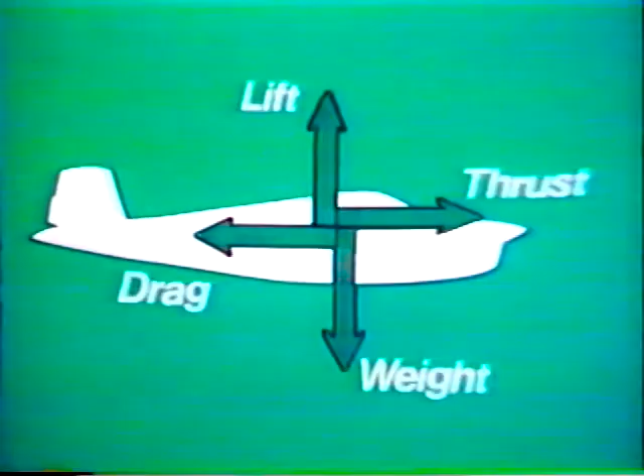In this first tape, I will revisit with you some of the areas you studied when you were first learning to fly. We will discuss the atmosphere, its composition, and its properties of pressure, density, and viscosity. Next, we will examine the 4 forces which act upon an aircraft in flight. We will look at an airfoil, name its parts, and establish terminology important to understanding the generation of lift, such as angle of attack, camber, angle of incidence, and chord line.

The principles and laws of Bernoulli will be explored along with the theory of circulation. As a result of this, the relationships among camber, relative wind, and angle of attack should be well established in your mind.

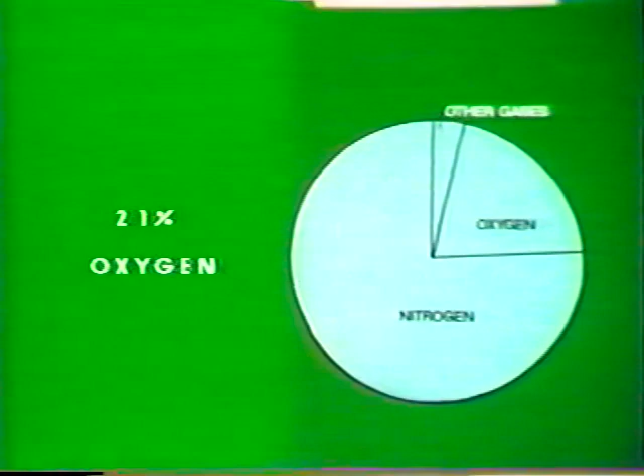Except for scientists who study it or environmentalists concerned about its quality, most people give little thought to the air which surrounds them. But if you're counting on it supporting you immediately after rotation from the runway, you should reacquaint yourself with it. Almost everyone remembers that dry air is 78% nitrogen, 21% oxygen, and 1% other gases. The ratio of these gases remains the same around the world and as high as the atmosphere extends.

Water vapor is also a gas found in the atmosphere. Its quantity may vary, unlike the other gases whose ratio is pretty well constant. It may make up from near 0% of the atmosphere to a maximum of about 5%. As the amount of water vapor increases at a given point, all other gases are reduced proportionately.

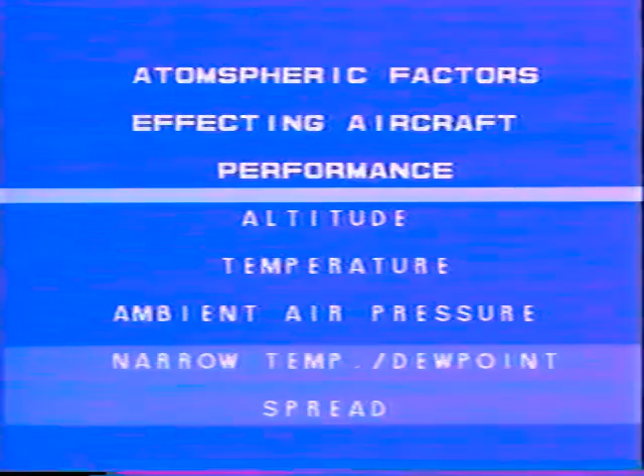Most of us probably know that air is a gas and as such has all the properties of gases. It has mass and weight. It can exert pressure, it can be compressed or diffused causing changes in its density, and it can flow. It offers resistance to objects moving through it. All of these properties are at work when you fly your plane through the atmosphere.

Let's first look at the words static pressure. Remember the 14.7 pounds per square inch you learned in junior high school science? That was supposed to be the normal air pressure. That is static pressure. You probably remember a specific number without any qualifications. However, the figure is an arbitrary one and only pertains to sea level on a standard day.

If you went to school in North Platte, Nebraska, the figure you learned as normal air pressure was about 1.5 pounds per square inch off. Air pressure on a standard day in North Platte is more like 13.2 pounds per square inch.

Static pressure, then, is the force exerted by the weight of the atmosphere pressing down from hundreds of miles in space. It is pressing down because it has mass and is reacting to the pull of gravity. If that is so, why isn't the pressure equal regardless of altitude? Why does North Platte, at a little over 2,800 feet, have over a pound of pressure less than at sea level? One of the other properties of air helps us explain it.

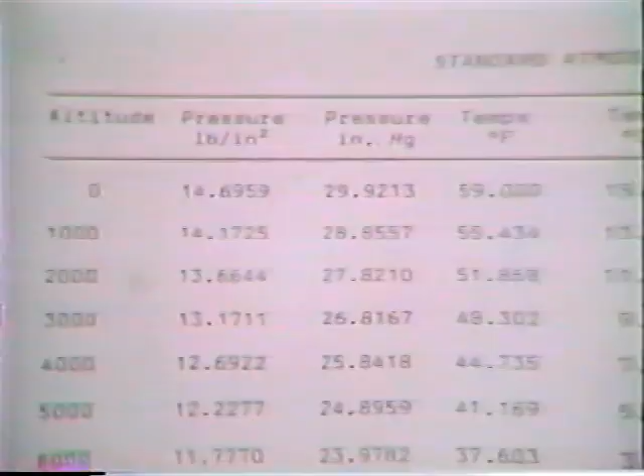Let's take a look at a chart which represents a standard day, one of those we mentioned earlier. This illustration is an excerpt and not the complete chart, which was originally put together by the National Advisory Committee for Aeronautics, the predecessor to NASA.

The chart is based on many years of weather observations, and since it was published, has been confirmed as basically accurate. Its purpose is to provide a common denominator for the measurement of aircraft performance and to provide a standard upon which to calibrate and correct the readings of some aircraft instruments. The chart will be important when we discuss aircraft performance and in other presentations dealing with instruments.

Before dealing specifically with any one of them, let's take a moment to review the four forces acting on an airplane in flight. You know them as thrust, drag, lift, and weight, or gravity as some prefer to call it. The two forces which are constantly trying to bring you to a stop on the ground are drag and gravity.

The two forces which you must produce to overcome these negative forces are thrust and lift. Thrust must be able to overcome drag, and lift must be able to overcome gravity before the plane can get off the ground. In a stabilized flight condition such as level flight, climb or descent at a constant velocity, thrust and drag are equal, and lift and weight are equal.

The propeller is producing a given thrust, but the total drag equals that thrust and limits the speed of the aircraft. The weight of the plane plus a little extra aerodynamic weight is equaled by the lift produced over the wings. In aerodynamics, this stable condition is known as equilibrium.

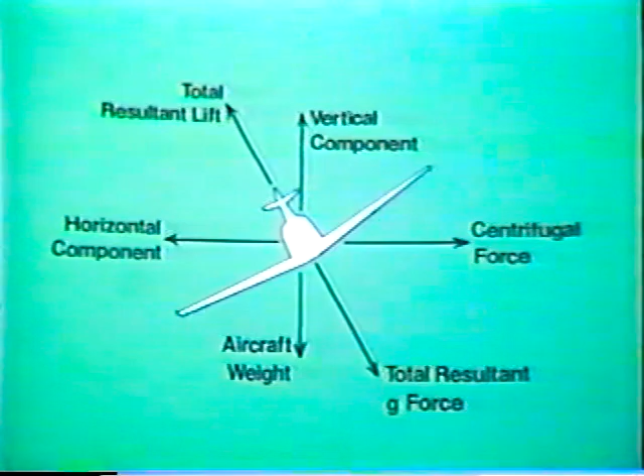Now we come to the big question. What is lift, and how is it produced? Before we get the answer, let's look at some pictures and review some more terms.

An airfoil is any part of the plane shaped so that it responds to air movement by producing differential pressure on either side of the airfoil. The wing, propeller, and empennage are the important airfoils.

Leading and trailing edges of the wings seem pretty obvious, but they do more than just outline the silhouette of a wing. Their location has much to do with the aerodynamics of an airfoil. A line connecting the leading and trailing edges of an airfoil is referred to as the chord line. It should not be thought of as permanently anchored, since it moves as high lift devices change the shape of the wings. Its position in relation to the relative wind and the longitudinal axis of the aircraft are extremely important.

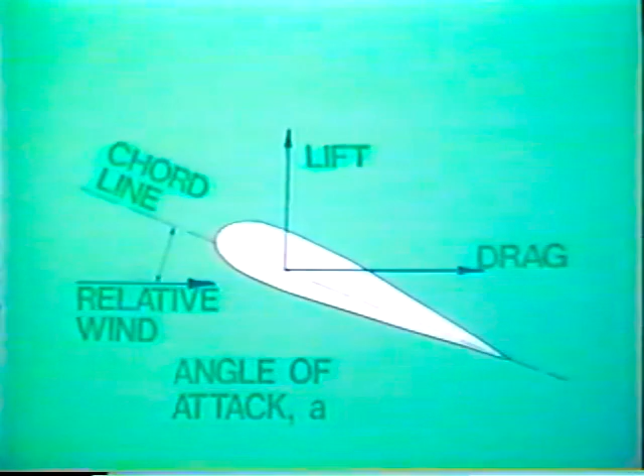Camber means curving or bending. On an airplane, it refers to the curving surfaces. A wing which has identical curvature top and bottom is known as a symmetrical wing. An asymmetrical wing usually has a flatter lower surface with more curvature on top.

Relative wind is the airstream created by the movement of the plane through the air. Most of the time its direction is opposite the flight path of the aircraft, but it may be deflected by gustiness or wind shear. Angle of attack is the angle between the relative wind and the chord line of an airfoil. Increasing the angle of attack will increase lift and also drag. It also determines the point at which a wing will stall. A given wing will always stall at the same angle of attack, regardless of speed or attitude.

It is rare that a manufacturer fits a wing to an airplane so that its chord line is parallel to the longitudinal axis of the plane. In normal cruise flight, they want the fuselage to be parallel to the ground, but it must be able to support maximum gross weight at the same time. Therefore, the wing is set into the plane at what is called the angle of incidence. This provides just enough angle of attack so that the pilot should not have to trim beyond a neutral position.

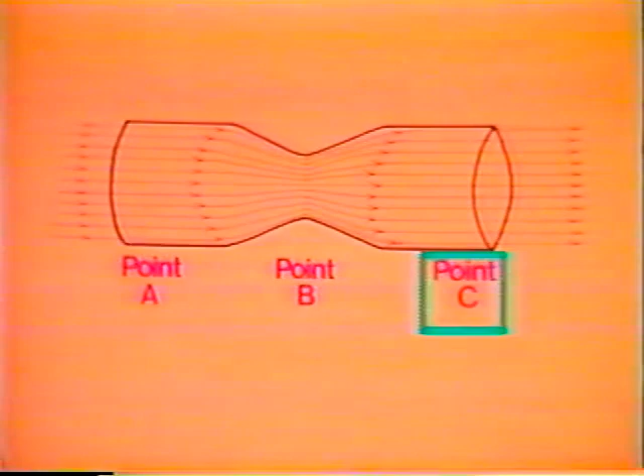The law of the conservation of energy requires that total energy in the tube remain the same. Therefore, we have taken from the potential energy to create some kinetic energy. Since potential energy was represented by static pressure, we have reduced the static pressure by using some of its potential energy to create greater velocity at the restriction at point B. After the airflow passes the restriction at point B, its velocity decreases and the pressure increases. If the velocity at point A and C are the same, then the pressure would be identical.

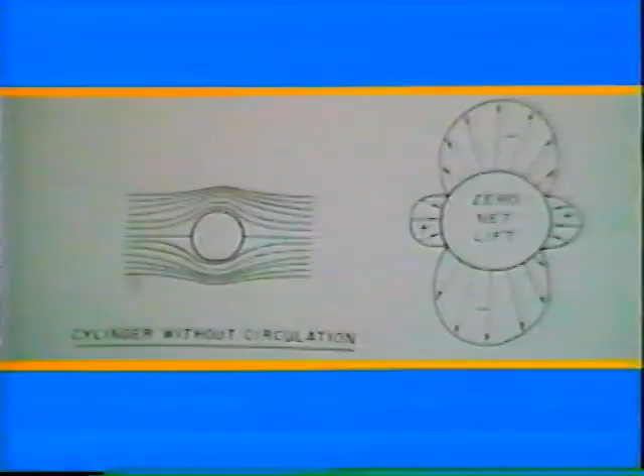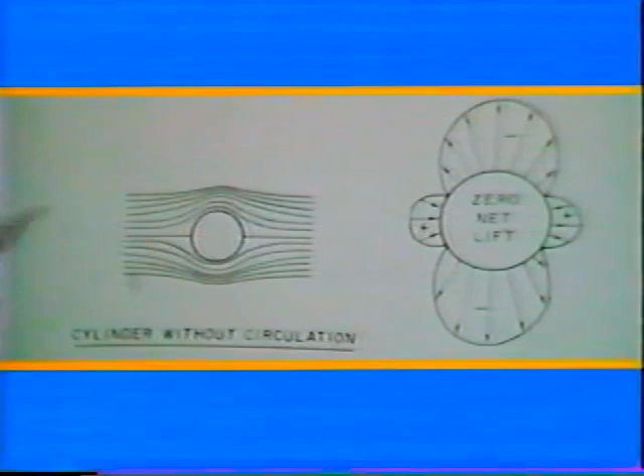Another important concept in the generation of lift is circulation. If you are a baseball fan, you probably have seen its effect on a pitched fastball. Look at this diagram of a cylinder and an airflow. We will ignore density and viscosity at this point. Note the pattern first where the cylinder is stationary, and in the second illustration where the cylinder is rotating.

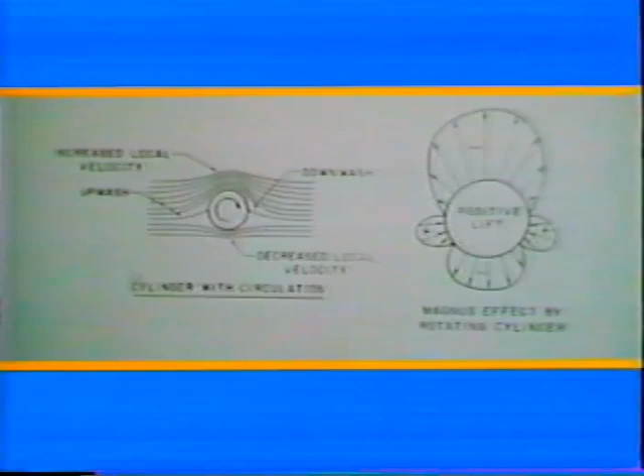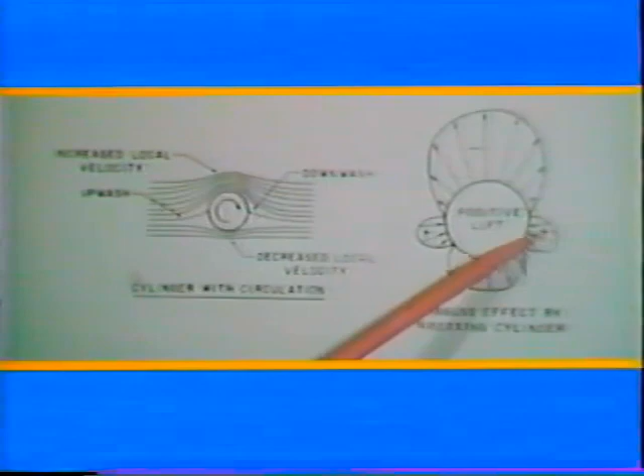The circulation of the cylinder has produced not only a larger amount of lift on its top side, but it has also produced an upwash ahead of the cylinder and has moved the stagnation points toward the bottom. There are normally two stagnation points on an airfoil. They occur along the leading and trailing edges of an object placed into an airstream. At the leading edge, where the air separates to go either above or below, a small area exists where there is no air movement. At this point, a stagnation pressure develops, which is the sum of the ambient pressure ahead of the wing and the dynamic pressure around the wing. A similar area occurs along the trailing edge of the airfoil.

Apply this concept to baseball. The pitcher puts some backspin on the ball as he throws. The highest velocity exists over the top of the ball, creating lower pressure there than on the bottom. This lifts the ball. It actually bobs up from the plane in which it was thrown.

And if it's a good fastball, the batter will undercut it completely.

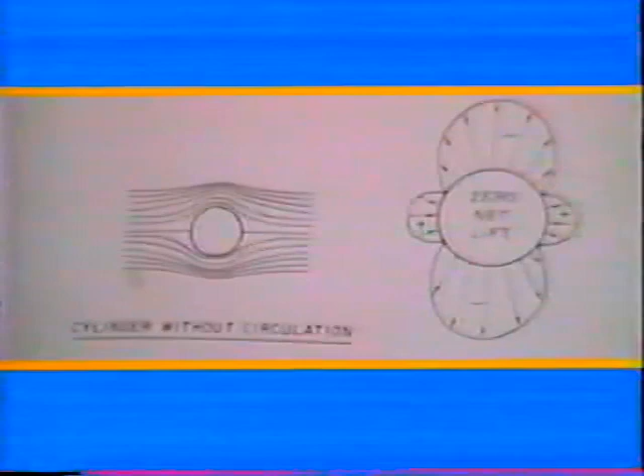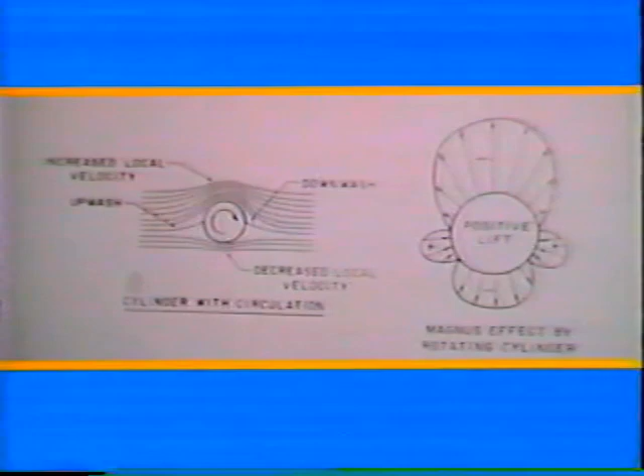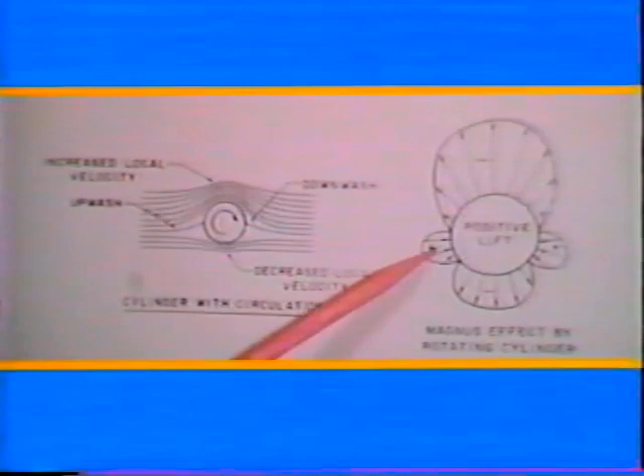Now look at the diagram where the cylinder has been placed in rotation. Lift forces on the top, where velocity is greatest, has increased, while the opposite is true on the bottom. The stagnation points have moved to a lower position. The net result is a positive force acting perpendicular and upward from the cylinder.

The position of stagnation points is of additional importance to you. It is the leading edge stagnation point that has the area where ice formations start. Because of the stagnant air at this point, the ice sometimes develops almost a horn shape, which continues to build out beyond the stagnation area under some circumstances.

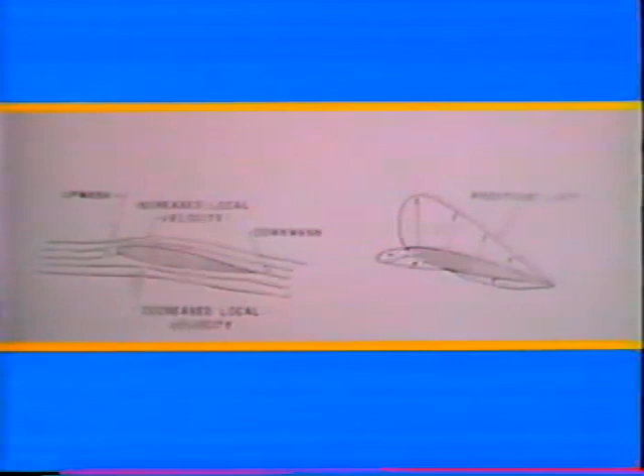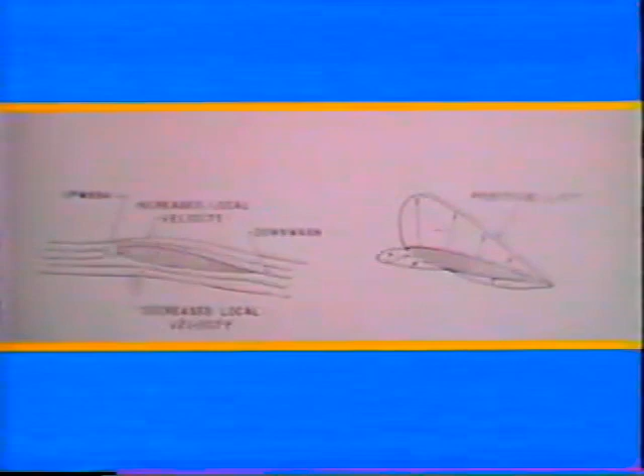The symmetrical airfoil, tilted to a positive angle of attack, shows very similar pressure patterns. Note also the upwash ahead of the airfoil and the downwash behind the trailing edge. The airfoil appears to have the same circulation around it as does the circulating cylinder. This helps explain why velocity of the airstream over the wing accelerates as the wing is placed in motion. It is subject to the same type of circulation.

One more observation deserves our consideration. The symmetrical airfoil at small angles of attack may develop negative air pressure both top and bottom. It will be true, however, that the least pressure will still be on the top of the wing. It is also true that at high angles of attack, the pressure on the surface will be increased. It will force large quantities of air down in the downwash coming from the airflow over the top of the wing. In this situation, up to one third of the lift force may come from the increase in pressure.

So far, I've presented you with three important concepts on the production of lift. First, the Bernoulli principle utilizes the theory of conservation of energy, and it explains why air placed in motion over an airfoil reduces the pressure. Second, the theory of circulation helps us understand why the velocity of air flowing over the wing is greater than that flowing beneath the wing. Third is Newton's third law, which states that there must be a reaction for every action. We know that large quantities of air are forced downward behind the trailing edge of the wing. If we force air downward, the reaction in nature is to force the wing up.

Now that we know why lift is produced over the wing, let's take a look at how engineers determine the amount of force produced by this phenomena. It will involve a mathematical equation, but not one that you should find very intimidating. The formula for lift looks like this: lift equals the coefficient of lift times one half of the density times the velocity squared times the wing surface area.

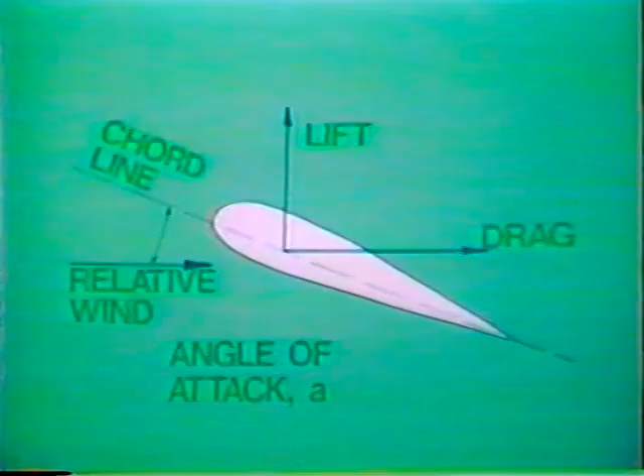All of the items seem obvious except coefficient of lift. This item is an index number representing the ratio between lift pressure and dynamic pressure. It is related to the shape of the wing and the angle of attack. The maximum lift coefficient for any wing occurs at the point of the stall. We know that a wing will always stall at the same angle of attack. We therefore reach the maximum coefficient and the stall angle of attack at the same time.

This has implications for landings and takeoffs. For illustrative purposes, let's place two aircraft on a runway side by side. All factors are equal except the maximum coefficient of lift. Airplane A has a maximum coefficient of lift of 1.8 with a thick asymmetrical wing, while B has a thin symmetrical wing with a coefficient of 1.0. Which plane will use less runway for its landing and takeoff? It will be the aircraft with the highest maximum coefficient of lift, or in this case, aircraft A.

Now, would it be possible to modify airplane B without changing to another airfoil and be able to equal the landing and takeoff performance of airplane A? Yes, it would. We could cut loose a section of the wing at the trailing edge and hinge it so it would kind of droop down. Why don't we call it a flap? Since shape is considered in our index, we bend the flap down until we get a camber which will be equal to 1.8 as its maximum coefficient of lift at the maximum angle of attack. Now, we can use the same landing and takeoff figures for both aircraft.

Additionally, we can retract the flaps while in cruise and have the benefit of a cleaner airfoil with less drag. The lowered coefficient of lift will be compensated for by increased speed.

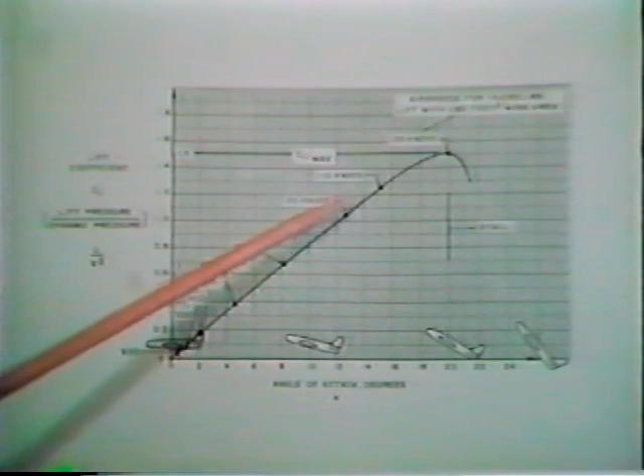This chart was taken from Aerodynamics for Naval Aviators. It shows that the coefficient of lift varies directly with the angle of attack. How is it possible that a diminishing angle of attack and a lower coefficient of lift can keep an aircraft in the air? The answer is your airspeed.

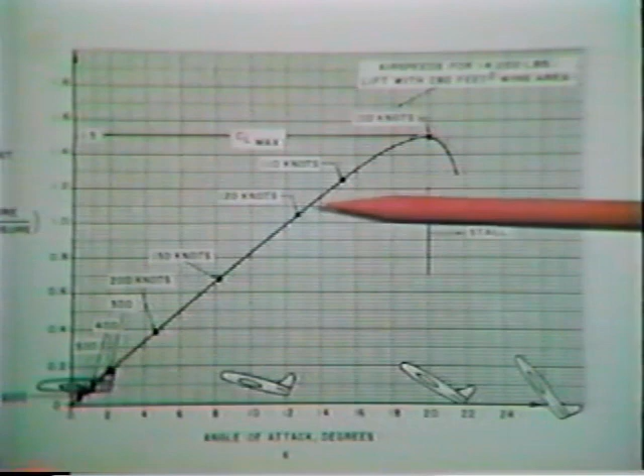Note on the line, which correlates index numbers and angle of attack, that selected airspeeds are also given. You will find that as the angle of attack and the coefficient of lift diminish, the airspeed increases. Many instructors use this information to demonstrate that control of airspeed is primarily a function of angle of attack. They further claim that power is used to control altitude.

Although discussions on this topic have appeared in the journals from time to time, it is well accepted that attitude controls airspeed and power controls altitude.

Well, we ought to regroup here for a moment. We have just determined that there are basically three things which determine how much lift you will get over your wings. They are relative wind, angle of attack, and camber. They are interrelated so that what affects one has an effect on another.

For example, let's take a plane in straight and level flight. If we retarded the throttle and began to lose altitude, you would automatically adjust the angle of attack if you wish to remain in level flight. This would reduce your airspeed, but by increasing the angle of attack, you have increased the coefficient of lift, which gave you the lifting force you need to remain at a given altitude.

There have been many pilots who have lost airplanes because they didn't understand this relationship. Take the full flap go-around as an example. Cleaning up flaps means reducing the coefficient of lift to that of a clean wing. Getting rid of flaps all at once without giving the plane a chance to accelerate and compensate for this loss may mean a stall and loss of altitude at a crucial point.

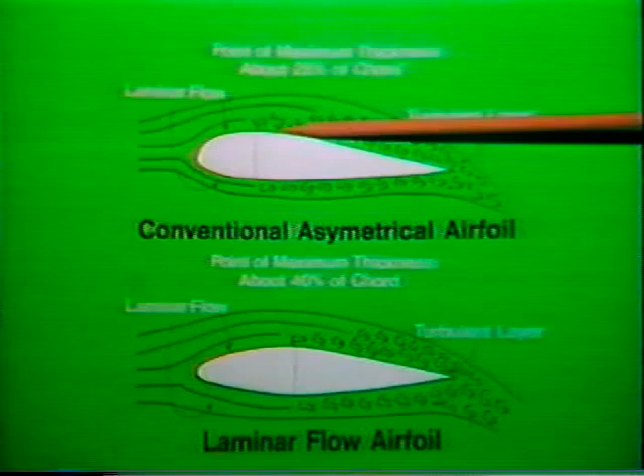Somewhere behind the point of maximum thickness of the camber, the airstream cannot hold to its smooth boundary layer. It becomes turbulent. As long as it has a strong enough velocity, it will remain layered. Stagnation pressure from the trailing edge of the wing is quite powerful. The velocity of the turbulent layer diminishes as it nears the trailing edge, and the airflow along the wing may actually reverse direction due to the trailing edge stagnation pressure.

What would cause the turbulent layer to lose velocity? When the angle of attack is increased, it becomes more difficult for the boundary layer to cling. The circulation effect produces an upwash at too great an angle over the leading edge. This allows the turbulence layer to spread toward the leading edge. Because it is turbulent, its velocity is decreased, and the trailing edge stagnation pressure amplifies the airflow separation.

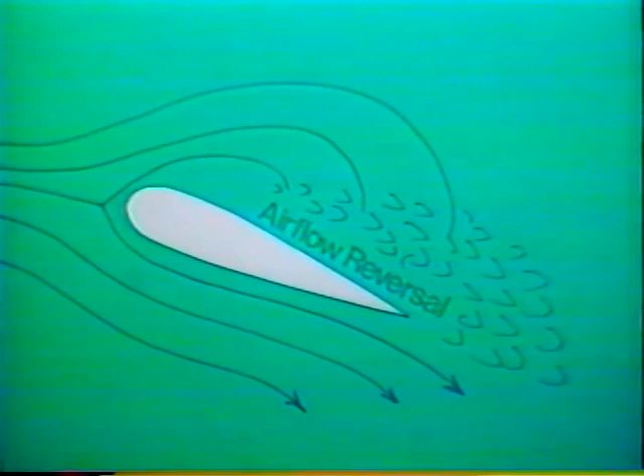At the stall angle of attack, this separation is complete. All you have left to keep you in the air is the downward deflection of the air from the bottom of the wing.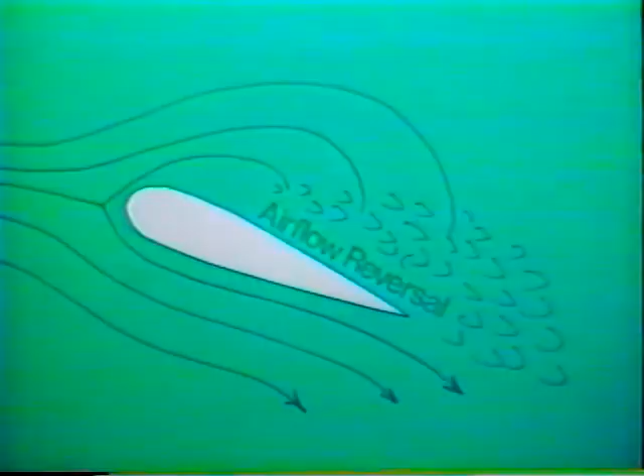Unfortunately, some training manuals leave you with just the images of the wing sections and their airflow patterns. Well, a wing just doesn't behave that way most of the time.

First, it is designed so that its stall pattern follows a known progression. A well-designed wing will stall first at the trailing edge near the wing root. Except for the T-tail aircraft, this places the tail surfaces in turbulent downwash, which produces the buffeting that is your warning of an impending stall.

It also leaves the tips to stall last, which gives some degree of aileron control up to complete stall. It also helps prevent the plane from developing nasty wing drops in a stall, which could happen if the tips stalled first. Your wing may still be flying when the stall breaks.

The reason the nose falls through the horizon with suddenness is that there is a complete stall close to the fuselage, which eliminates the downwash over the horizontal stabilizer. Your plane depends on that downforce to balance a nose-down pitch built into it at the factory. With the tail force gone, the pitch force takes over and drops the nose.

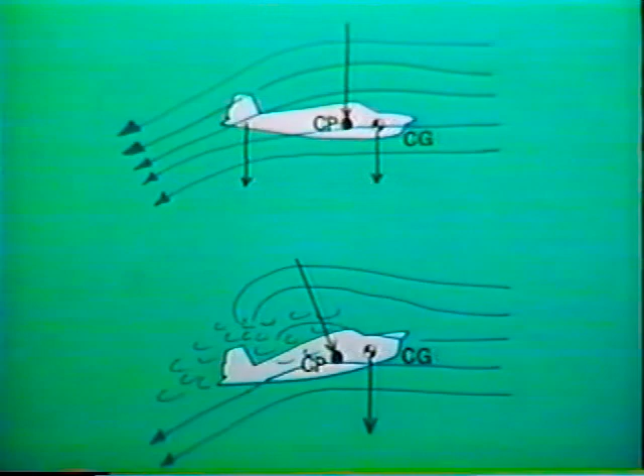By stalling the wing root area first and having the stall progress outward from the fuselage, the pilot is given a warning of an impending stall. The nose will automatically pitch downward toward recovery, and aileron control will exist well into the stall, but not after a complete stall. The way designers get the wing root to stall first is usually to twist the wing

by giving it a smaller angle of incidence at the tip than it has at the root. It's only a matter of a couple degrees, but it does the job. It's also possible that the airfoil near the tip is of a different shape than the airfoil in the main wing section. If the coefficient of lift is higher at the tips, it will mean that the tips remain flying after the main wing has stalled.

Another technique for inducing root stall first is to place a small triangular strip on the leading edge near the wing root. At high angles of attack, these strips disrupt the smooth airflow over the wing enough to induce early airflow separation and will initiate the stall at that point.

A point worth repeating concerning stalls is that they can occur in any aircraft attitude and at any airspeed. A snap roll at the top of a loop when the plane is inverted is a stall maneuver. High-altitude aircraft cruising just under Mach 1 have stalled in clear air and have fallen thousands of feet before recovery.

The angle of attack at which a given airplane will stall is always the same. Your stall warning device is set to trigger at a few degrees below the stall angle of attack. Remember that the next time you make a tight turn from base onto final, believing that just a little extra airspeed will compensate for the higher angle of attack needed to support the airplane.

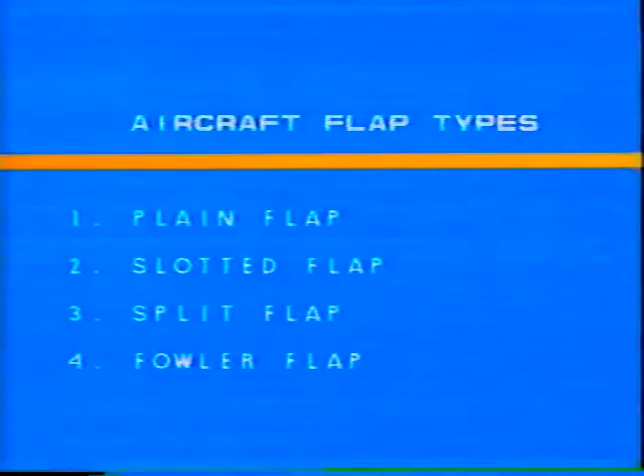Modern aircraft are equipped with any of four types of flaps: the plain flap, slotted flap, split flap, and Fowler flap. Their primary purpose is to allow for steeper landing approaches by increasing the coefficients of lift and drag.

Many general aviation aircraft use a version of the plain flap, which is essentially a section of the trailing edge which can droop to, say, around 40 degrees.

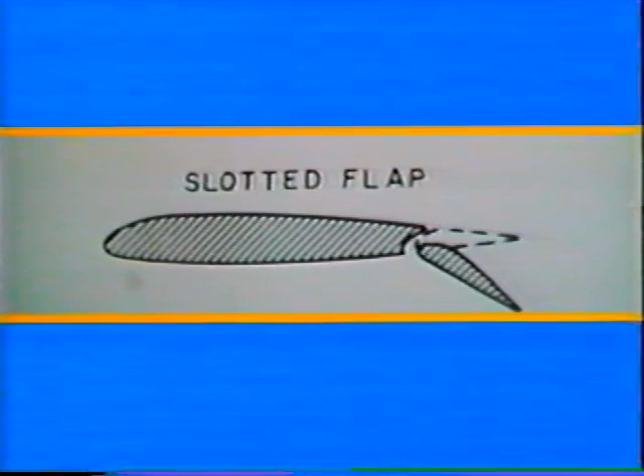The slotted flap is related to the plain flap. The difference is that the flap is pushed back away from the wing as it comes down. This allows high energy air from below the wing to be ducted over the flap. The renewed airstream gives the boundary layer the velocity needed to delay airflow separation longer, which increases the coefficient of lift even more. A close look at a Cessna high-wing airplane will give you a good picture of this type of flap.

The flap used on the Gooney Bird, the legendary DC-3, is called a split flap. In this type, just the lower surface of the wing droops down instead of the entire trailing edge section. Its coefficient of lift is slightly better than the plain flap, but it produces great quantities of drag.

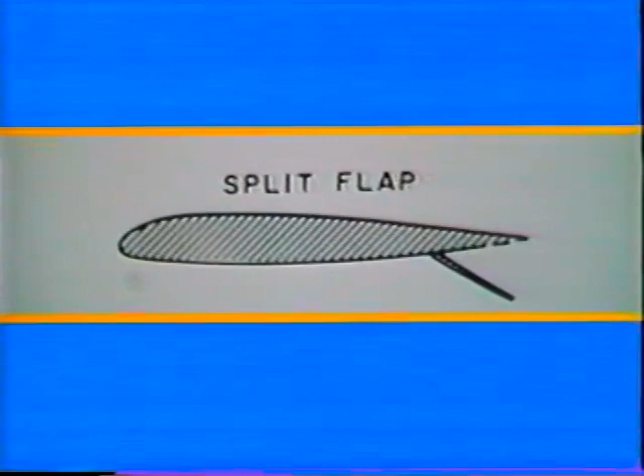The Fowler flap not only droops to change the camber, it also uses a portion of the undersurface of the wing to increase wing area by sliding it aft as it is lowered. The total wing surface is one of the prime factors in the lift formula. A flap which can increase the coefficient of lift and at the same time increase wing area will greatly add to the lifting force. That is what the Fowler flap does. However, it needs a complicated mechanism and some pretty heavy hardware, which makes it expensive to install on the average general aviation airplane.

High-performance aircraft will often include lifting devices on the leading edges as well as the trailing edges. Here's why. Earlier, we discussed how the boundary layer converted to a turbulence layer slightly aft of the point of maximum wing thickness. With flaps down, the turbulence layer tends to separate from the surface more readily. The boundary layer needs a dynamic shot in the arm, and that is provided by opening a contoured slot along the leading edge of the wing, which allows the boundary layer to pick up enough momentum to delay the onset of the turbulence layer, which improves the coefficient of lift.

The movable slat is the most common leading-edge high-lift device. It is either automatically operated by the airflow or operated manually by the pilot. In addition to allowing for a smoother airflow over the wings, these leading-edge slats, or flaps, also change the camber of the wing and improve the coefficient of lift.

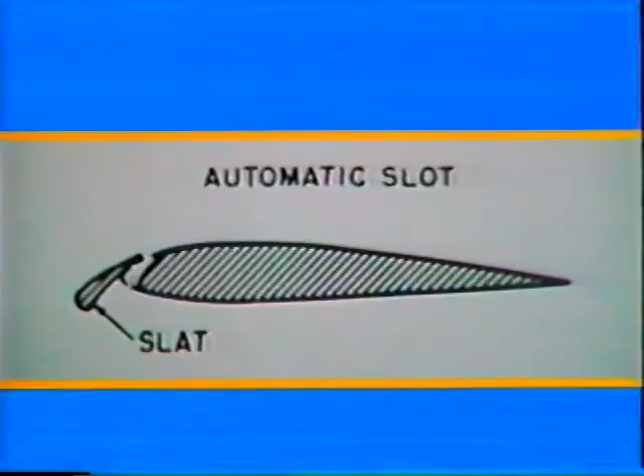It was the automatic retraction of the leading-edge flap on the left wing of the DC-10 in Chicago which caused the wing to stall, rolling the aircraft out of control.

Experimentation continues with devices designed to control the boundary layer for the full width of the wing. The engineers have been quite successful with boundary layer control, but have yet to figure how to eliminate the miles of plumbing necessary to make it work. The two major systems either bleed air from the surface through hundreds of tiny holes to a suction pump, or force air through the holes from the compressor section of the turbine engine. Either way provides the aircraft with a new, higher stalling angle of attack. Although results have been good, the cost-benefit ratios have not yet been positive enough to put it into production models.

We have now scratched the surface of aerodynamics by helping you understand perhaps a little better the concept we call lift. We know it is a direct product of properties and conditions which prevail in the atmosphere. Static and dynamic pressure, density and viscosity of the air around us determine conditions for the production of lift. We have dissected a cross-section of the wing and named its parts: leading and trailing edges and chord line. We have defined and differentiated between angle of incidence and angle of attack.

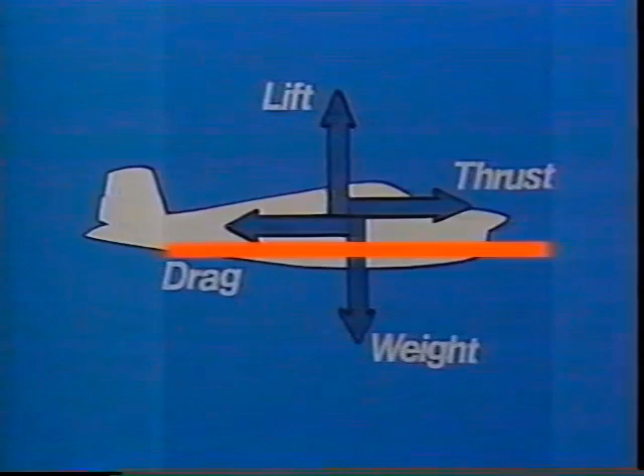The atmosphere becomes a very busy place once you place an airfoil in motion through it. Now, we all know drag opposes thrust. It goes to work as soon as the air starts to move the airframe. It's always with us as we fly, and we even make good use of it at times.

As pilots, we can't do anything about most of it, but we do have some control over one type. Most of us learned that there are two types of drag: parasite drag and induced drag. You buy parasite drag with the airplane. Its design and general condition will determine how much there will be.

Induced drag is a product of lift, and this is where you can exert the most control. I will take up parasite drag with you first, and we will see what we can do to keep it to a minimum. It has several subdivisions, which we will look at one at a time: form, skin friction, interference, separation, pressure field, power plant, and wing section profile.

Form or flat plate drag is sometimes referred to as the barn door effect. It is created by the total frontal area of the plane and includes not only the fuselage, but gear, struts, wires, and antenna as well. Many ultralights have large quantities of form drag, part of which is the human body hanging below the wings.

Skin friction drag is created by the rubbing of the air molecules against the total exposed surface of the plane. It is directly proportional to the amount of surface and the roughness of the surface. Many home-built planes made of composite materials can be rubbed to a super smooth finish, thereby eliminating a good chunk of skin friction drag.

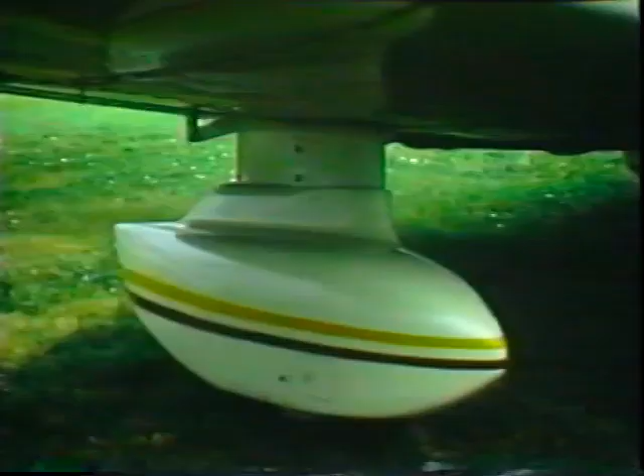There is a tendency for the airflow to break down and separate wherever an appendage meets the fuselage. This creates what engineers call interference drag. Some of this type of drag can be eliminated by placing streamlined fairing where the wings, landing gear, struts, etc. meet the fuselage.

Separation drag is interference drag in that it is the result of design problems. It may occur wherever there is an abrupt contour change in the fuselage shape. The switch from the straight razorback fuselage to bubble canopy on some World War II fighters, such as the Spitfire, P-47, and P-51, caused a breakdown over and around the tail surfaces, necessitating the addition of a ventral fin ahead of the regular vertical fin. While the ventral fin did not totally compensate for drag, it did restore directional stability.

Whistling doors are a clue to the fact that you may have what could be referred to as pressure field drag. It occurs around leaky doors, cowlings, and all control surfaces. You can install new door seals and tighten up cowlings, but the leakage around the control surface is a design problem that modification or redesigning may take care of.

Power plant drag consists of the energy used in cooling the cylinders, providing ram air to the carburetor, and driving accessories. Cowl flaps allow for adequate cooling during ground operation and high horsepower maneuvers, but are closed in cruise to eliminate some of the power plant drag.

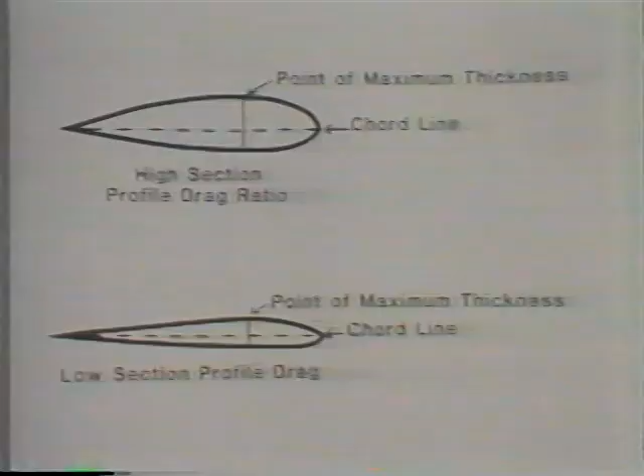In selecting the airfoils which will be used on a particular aircraft, the engineers must be concerned with wing section profile drag. Section profile means that the airfoil shapes taken from cross-sections of the wing at various stations are being considered. The designer must consider such things as the ratio of maximum thickness to chord, at what point along the chord the maximum thickness will occur, and what kind of curves will be used. This information is important not only in determining the coefficient of lift, but also the section profile drag.

The ideal airfoil section would have a high coefficient of lift with a low profile section drag. Since this is an impossible design to come up with, every section airfoil is a compromise. It's further compromised by other considerations such as the thickness of the main spar and whether flaps or ailerons will be part of that airfoil. In summary, wing section profile drag is extremely important to the aircraft designer in establishing the efficiency of the wing for a particular aircraft. Total drag consists of all these parasite drags plus induced drag.

Your control over parasite drag consists mainly of keeping your plane clean and waxed and sealed up tight. You do have some control over induced drag, so let's talk about that.

Placing a wing in motion produces both lift and induced drag. It's like having a date with Siamese twins. If you take one, you have to take the other, regardless of how ugly the other one might be. We look at lift as being the desired twin and drag the ugly one. I'm sure you've heard an unpleasant date partner described as a drag, but we know that one must look deeper than the epidermis to discover all the qualities of a person. Maybe we can apply this to induced drag as well.

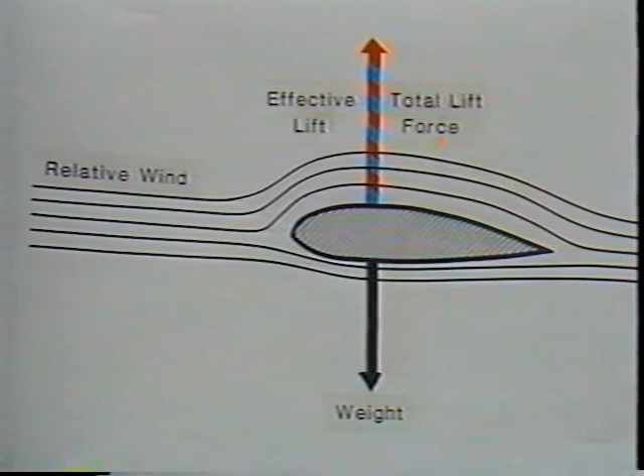In diagram 1, we show a hypothetical situation of level flight with a neutral angle of attack and an asymmetrical airfoil. In order to remain level, lift must equal weight. The lifting force opposing weight we will call effective lift. It is blue in color. In this situation, the effective lift is equal to the total lifting force of the wing. Total lifting force is red.

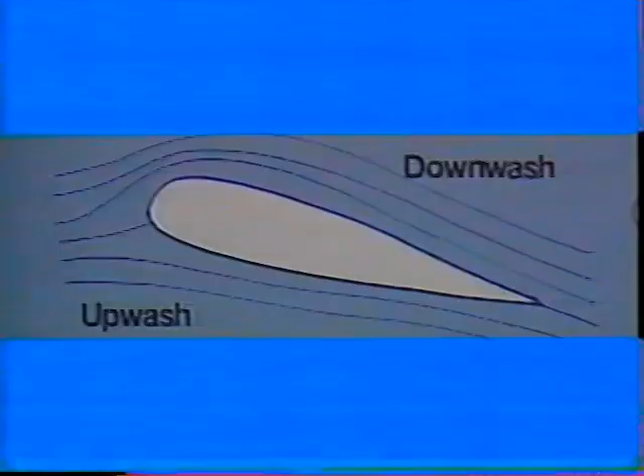Before we go to diagram 2, a word about average relative wind. In basic aerodynamics, you learn that wind is always opposite and parallel to the path of the plane. This is true of the main airframe, but not always true of the wings. A moment ago, I mentioned the circulation theory and pointed out how air sweeps up ahead of the wing and produces a downwash behind it. The circulation of air creates a slightly different relative wind for the wings, which is usually inclined upward from the path of the plane. As the angle of attack increases, so does this average relative wind.

You have been told that your plane will always stall at the same angle of attack. As you demonstrate a stall on your next biennial flight review, observe the angle made between your wing chord line and the horizon. You know your wing is supposed to stall at maybe 18 degrees, but you are observing 30 degrees. This is because the wing's average relative wind is at a much higher angle than the relative wind for the plane as a whole.

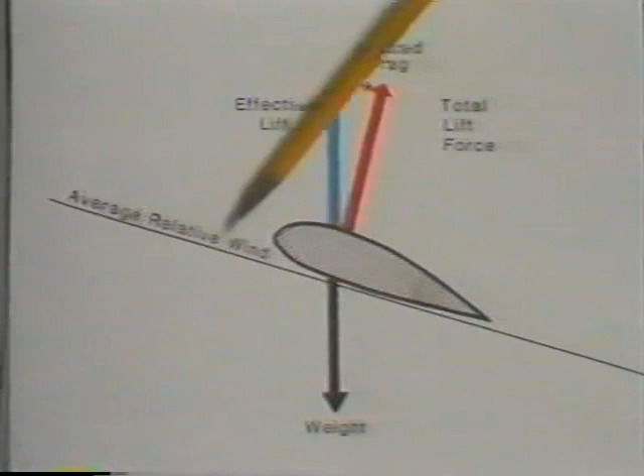In diagram 2, I have introduced a small angle of attack. Note that the average relative wind is also slightly inclined to horizontal.

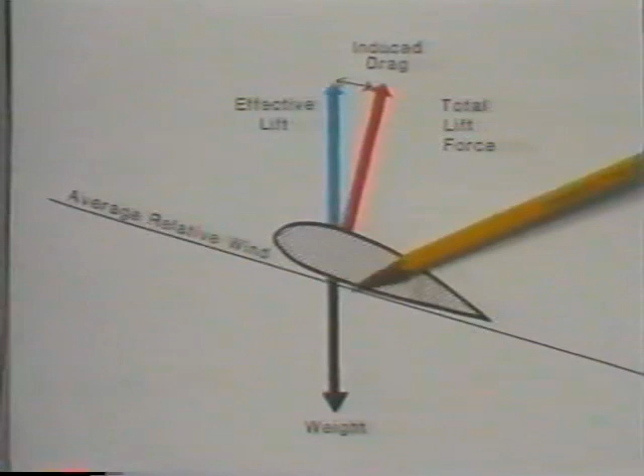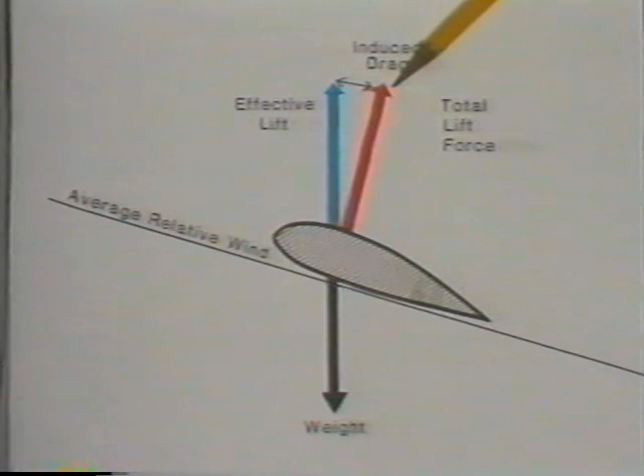We are still in level flight, so the weight and effective lift are equal and opposite. However, the total lifting force of the wing acts at 90 degrees to the average relative wind. It is now inclined aft and has become greater than the effective lift. The significance of this is that some of the total lift force is now acting toward the rear. It is opposing thrust, so must be classified as drag, induced drag to be specific.

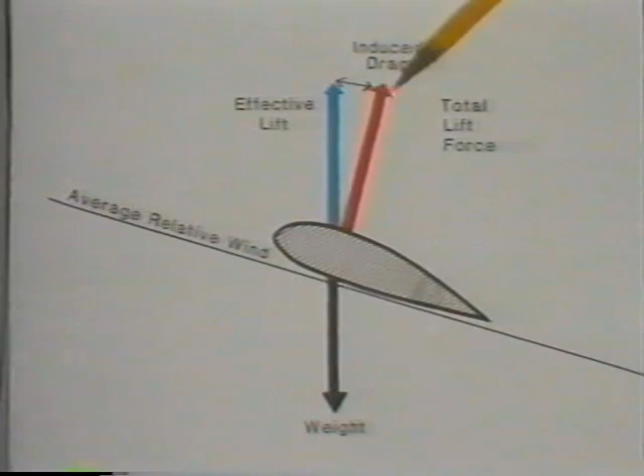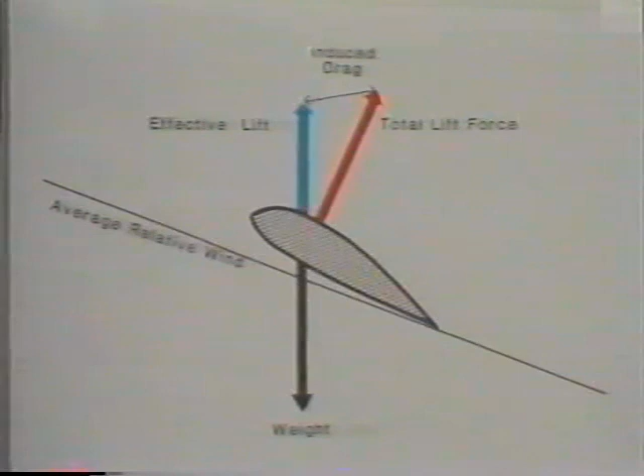How much induced drag is being produced in this instance? We can find that by measuring the distance between the tips of the red and blue arrows. In diagram 3, we have further increased the angle of attack and the average relative wind. Note that the total lift force is at a much larger angle to the effective lift vector and is longer. This situation produces more space between the arrow tips, indicating greater induced drag.

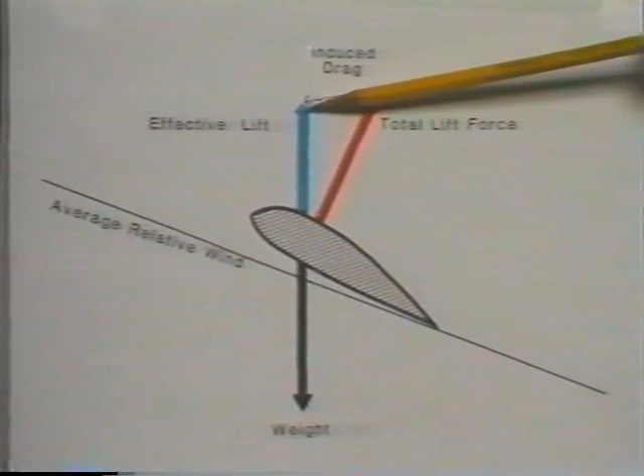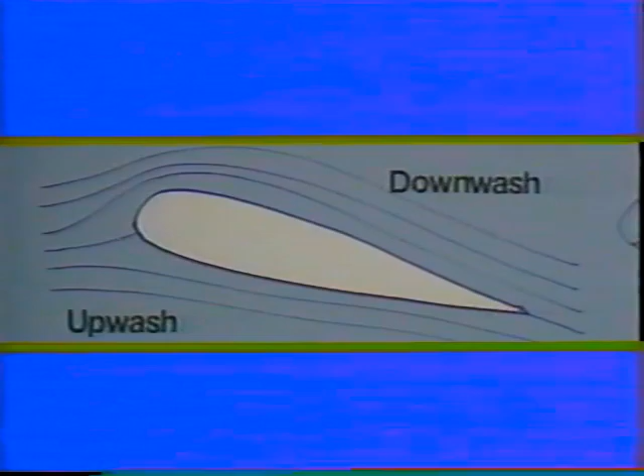Although it may not be completely obvious from our diagrams, the conclusion is that induced drag not only increases with an increased angle of attack, but it also increases at a greater rate than the angle of attack. This is the diagram we used, and you can see that the relative wind for the aircraft sweeps up just before it gets to the leading edge of the wing. As it passes over the wing, a downwash develops and continues behind the trailing edge of the wing.

We're not through with induced drag just yet. So far we have dealt only with idealized cross-sectional diagrams of wings. If we put the whole wing together, we will see that the dynamic air does not seem to follow as simplistic a path as in the previous diagrams. The air currents flowing over the wing will take a diagonal path leading toward the fuselage. The currents under the wing will move diagonally toward the tips.

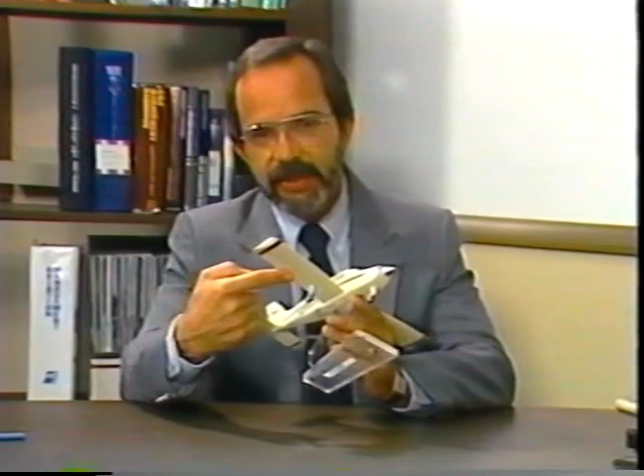Why is this so? It is the nature of liquids and gases to try to fill in any weak spots or holes. We know that the area over the top of the wing has something less than the ambient air pressure. We also know that the air pressure beneath the wing is a bit greater than ambient air pressure, and the higher pressure will try to fill in the area of the lower pressure. Since the wing blocks the passage except for the tips, there is a movement along the bottom of the wing toward the tip. Once there, the air spills up and over, creating a vortex which trails behind and below the tip of the wing.

The curling of the air currents over the wing at the tips produces a force which causes the air to be deflected toward the wing roots on the upper surface of the wing. All wings presently flying have tips which produce some amount of vortex. In a vortex, the downwash is greater than the upwash. This situation creates a higher induced angle of attack, which in turn creates higher induced drag. The heavier an aircraft becomes, the slower it flies, the greater the vortex becomes. This means that induced drag is greatest as your plane approaches its level flight stall speed.

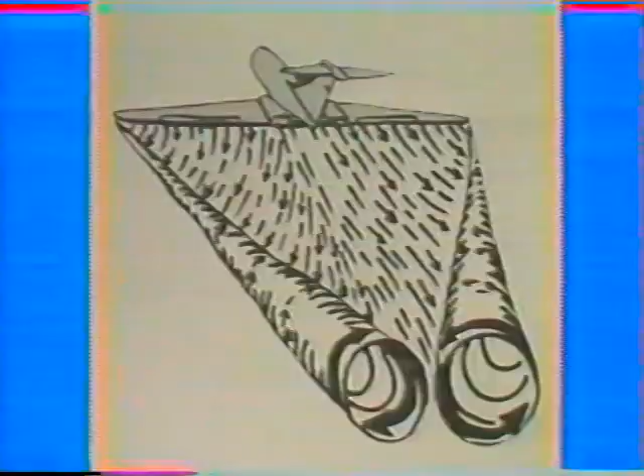From your first lesson to your last approach, you have been continually warned to be alert for wake turbulence. Right now you can probably visualize those twin tornadoes trailing from the tips of a 747. They will drop 800 or 900 feet, level off, and begin to spread apart. Perhaps you have been warned about the big planes so much that you aren't prone to visualize these same tornadoes streaming from a King Air, a C-130, or a Cessna 210. Wake turbulence is generated by all winged aircraft in flight, including helicopters. A good rule to follow is, big and slow, don't fly below.

The most successful attempt to reduce vortices and induced drag is the winglet. It was developed originally by NASA and has been utilized by several manufacturers. The effect of a winglet is like an extension to the wing, which increases aspect ratio. A higher aspect ratio diminishes the vortices but does not eliminate them. A diminished vortex results in reduced induced drag. If a designer can reduce the tip vortex, he would lower the wing's average angle of attack, thereby reducing induced drag. There is a way to do this.

It lies within the ratio of the wingspan and its chord and is called the aspect ratio. The aspect ratio for a rectangular wing, similar to the ones on many general aviation aircraft, is found by dividing the wingspan by the average chord. A high number would indicate a long, narrow wing, such as those used on high-performance sailplanes.

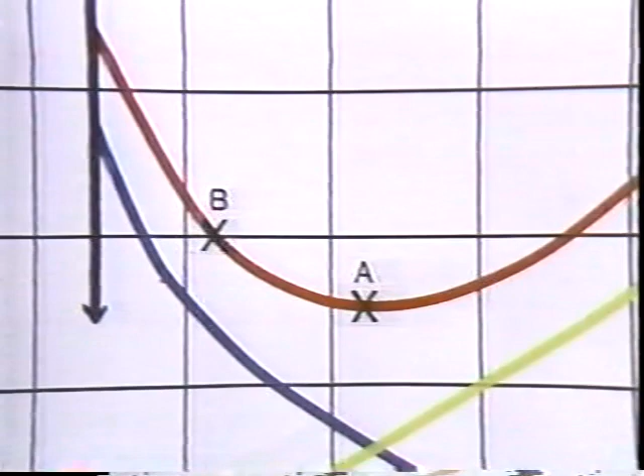In interpreting this graph, if we assume that the aircraft is producing lift equal to 1g, or the weight of the plane, the lowest point, point A, on the total drag curve, would give the least amount of drag relative to lift. This point would give the highest lift to drag ratio.

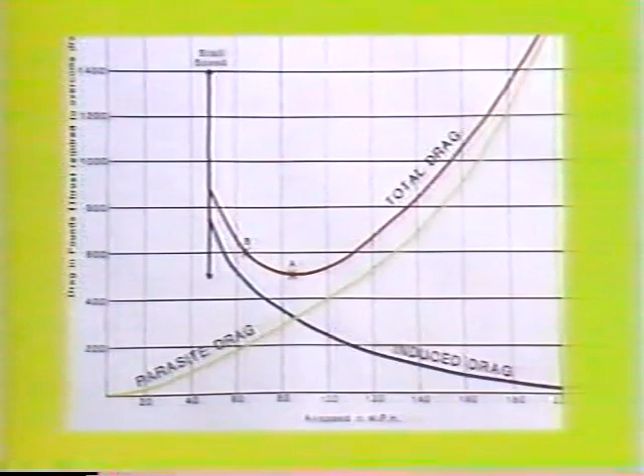The airspeed at the point where induced drag and parasite drag are equal will give this plane its maximum range and also its maximum power-off gliding range.

The maximum lift to drag ratio for a given aircraft is established at a fixed angle of attack. On your airplane, the maximum range would occur if you always flew it at the same angle of attack regardless of weight. However, weight will vary, so something must give, and that is airspeed.

For maximum range, you would maintain an angle of attack and decrease airspeed as fuel burned off and lightened the aircraft. If you were flying a single-engine aircraft 10,000 feet above the surface and had a power failure, how far would you be able to glide before landing?

The answer lies with the angle of attack, which will produce the highest lift-to-drag number. For a hypothetical airplane, a given angle of attack could produce a lift-to-drag number of 10. This is a glide ratio of 10 to 1. You could glide almost 20 miles from that altitude, provided you maintain proper angle of attack.

Your airspeed would depend upon the weight of the plane. The trouble with this idea is that we don't have a good, inexpensive angle of attack indicator. You don't ever know what the angle of attack is at a given time.

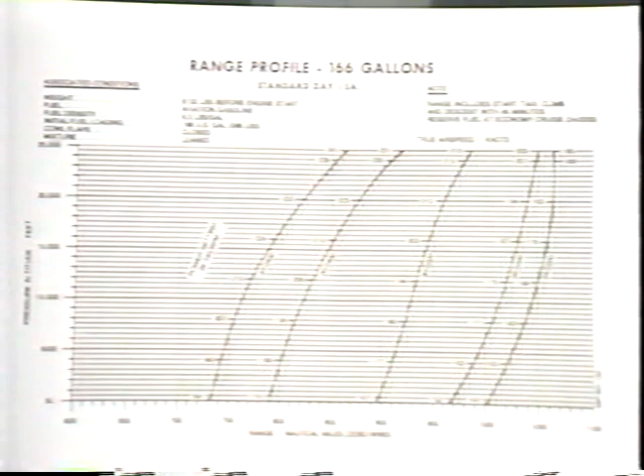The best substitute is a chart giving the lift-to-drag numbers at various airspeeds and weights. Most aircraft operating manuals will give range charts or graphs in the performance section.

Although they seldom mention the lift-to-drag numbers, the charts are based on calculations from the lift-to-drag ratios. There are a couple of other figures which you can obtain from a chart of drag curve.

A plane's range and endurance are not the same. By slowing the airspeed further, you can keep the plane in the air longer.

A rule of thumb might be, if you know the maximum range and maximum gliding range airspeeds of your plane, you can calculate 75% of that figure. You now have the maximum endurance speed. It's pretty slow, but it will keep you in the air longer, if time is more important than distance.

No one is going to give you a medal for the most turns made in a holding pattern. The maximum endurance airspeed is at a point where induced drag is creating 75% of the total drag. Keep in mind that it is really a specific angle of attack rather than an airspeed, but for lack of anything better, we must go with airspeed.

One more thing about the airspeed for maximum endurance. It is also the airspeed which will give you the least power-off sink rate. So, for that forced landing due to engine trouble, if your chosen field is under you, you may want the slower speed to give more time for communications and setting the plane up for landing. Certainly you would want to consider minimum sink on a night forced landing.

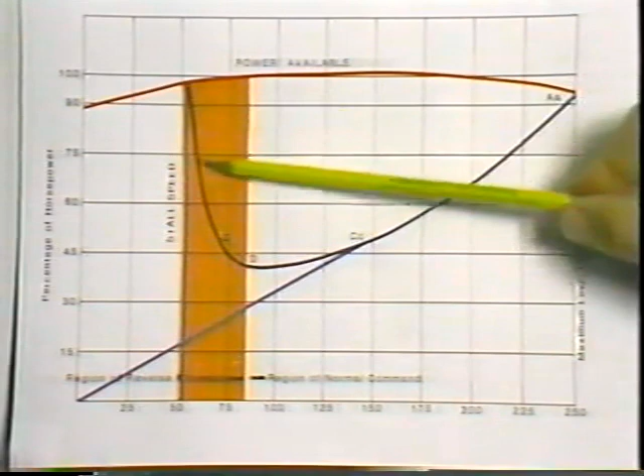The graph I refer to is the power required curve, which includes information on the flight in the region of reverse command. At first glance, you will see that the power required curve resembles the curve for total drag. That is only natural, since thrust equals drag in order to maintain a given airspeed.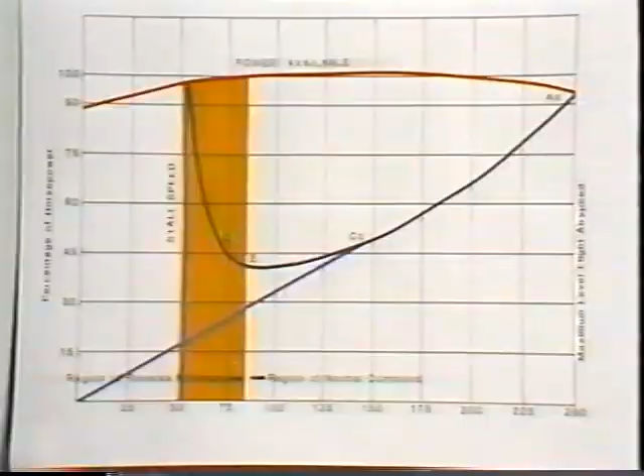However, thrust and power are not quite synonymous. Power is the work turned out by the engine, which it transmits to the propeller, which in turn converts the energy to thrust. In the process, there is some loss of energy, especially at the extremes of airspeed.

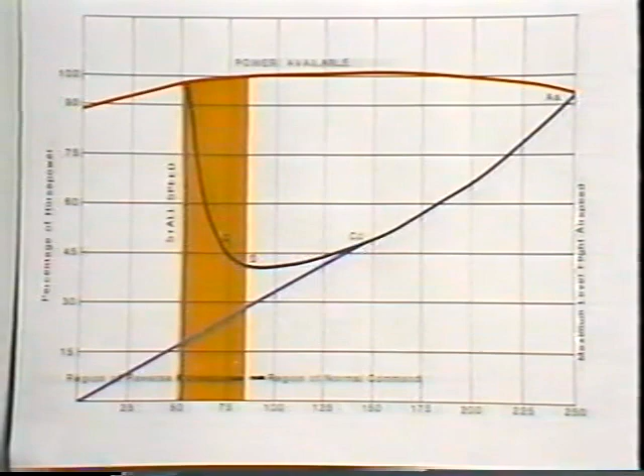This is indicated by the power available curve near the top of the chart. The horizontal lines represent percent of brake horsepower, and the vertical lines represent indicated airspeed. The curve begins on the left at the stall speed and ends on the right at the end of the power available line.

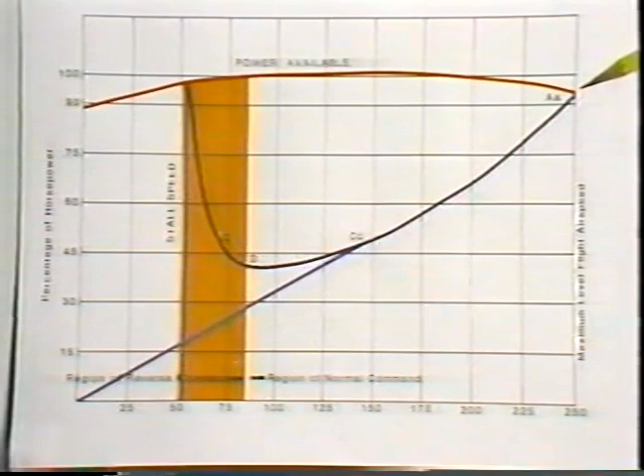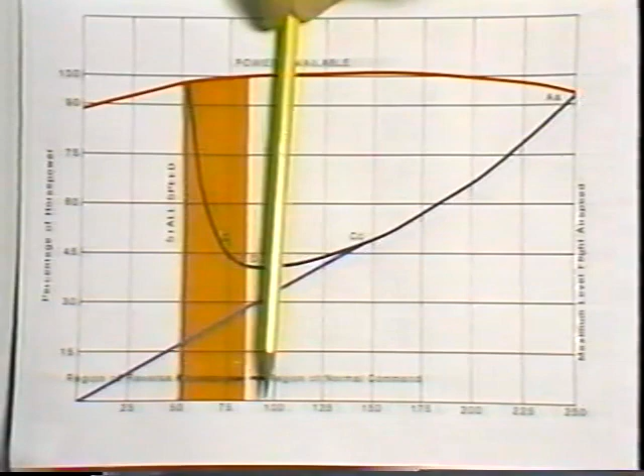To the right of the vertical line, through point D, is the region of normal command, or what we call the front side of the power curve. To the left of the vertical line is the region of reverse command, or the back side of the power curve. Consider point D first.

It is located at the lowest point of the curve, where the power requirement and consequently fuel consumption are at a minimum. This point represents the requirements for maximum endurance and minimum sink glide. At this point, any change in the angle of attack will produce a loss of altitude if power is constant.

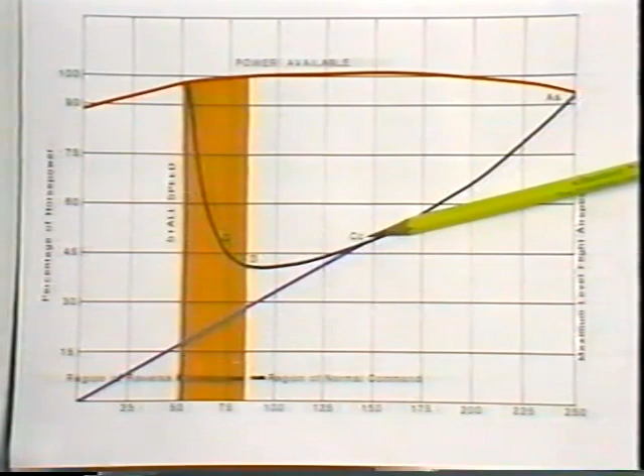Point CC is located at the place where a line from the origin of the graph touches the curve as a tangent. This represents the maximum range and maximum gliding range requirements. The significance of this location is that there is a large increase in airspeed at only a slight increase in the power required.

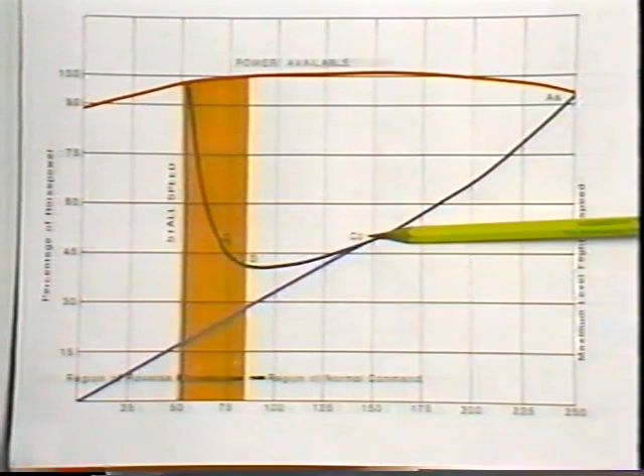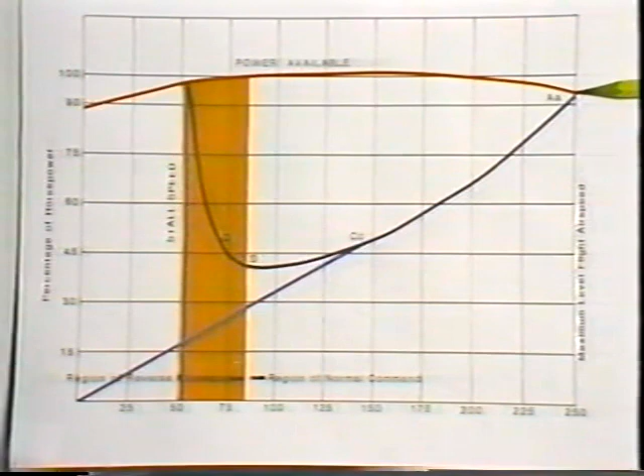At point AA, the pilot is using full power available to maintain maximum airspeed. As at point D, any change in angle of attack will cause a loss in altitude. There is no more power to compensate for a higher angle of attack, so the plane will descend. Lowering the angle of attack will give you increased airspeed, but it will come at the expense of altitude.

At any point on the front side of the curve, an increased angle of attack will slow the aircraft and it will climb. A decreased angle of attack will increase speed and cause a loss of altitude. This is what you expect as you fly, and this is why it's called the region of normal command.

You will note that for every power setting necessary to maintain a given airspeed on the front side of the power curve, there is an identical power setting required to maintain a much lower airspeed on the back side of the power curve. It is a fact that while in the region of reverse command, the slower you fly, the more power it takes to maintain altitude.

This is due to the power of induced drag while the wing is at high angles of attack. Let us assume that the airplane at point C is on a long, power-on final in a busy traffic pattern at an airport with training activities. His airspeed is 73, and he is using 50% of power.

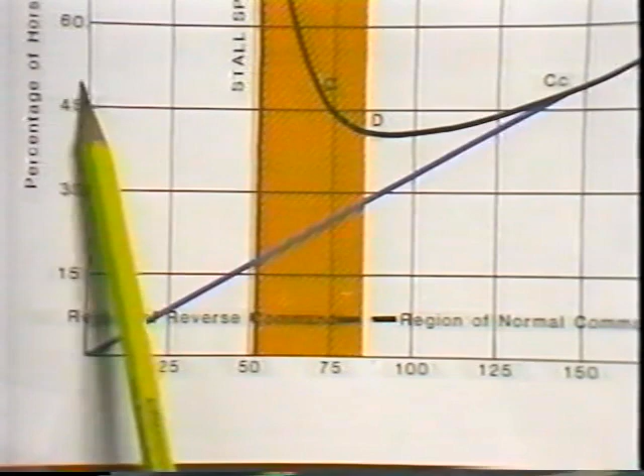Any nudge from his current angle of attack will produce results reversed from normal. Let's suppose this pilot lets the nose drop a little due to some gustiness close to the ground. The airspeed will pick up, but the aircraft's inherent stability will not automatically correct for the extra speed. Unless the throttle is retarded, the plane will momentarily retain the additional airspeed and will climb. Climb with the nose down? That is correct. Remember, we are now in the region of reverse command.

Now, let's try to put it another way. The nose of the plane eases up a bit. The airspeed slows a bit, and the plane begins to sink. The pilot raises the nose a little more and adds some power to regain his approach speed of 73. At this point, 73 is no longer enough. The increased angle of attack has added a large amount of induced drag, which is acting just like a drag chute. The only cure at this point is a lot of power and a lower angle of attack.

If the pilot continues to maintain his approach by increasing his nose-high attitude, he will probably mush into the ground short of the runway. It could even happen with the throttle wide open under certain circumstances. Pilots don't get in trouble with the region of reverse command at cruising altitudes because it only occurs at the slower speeds, and these problems are usually on takeoff or landing.

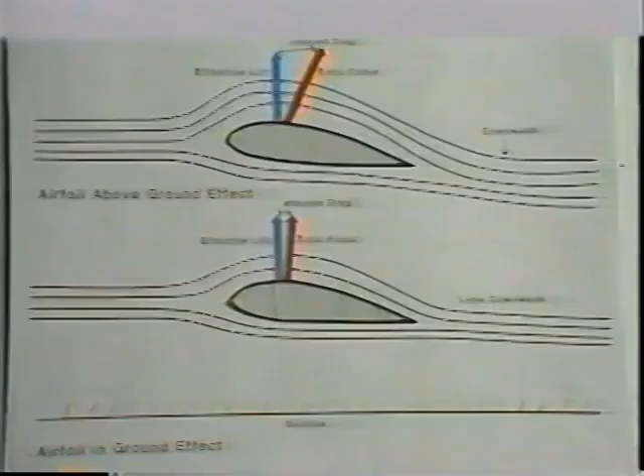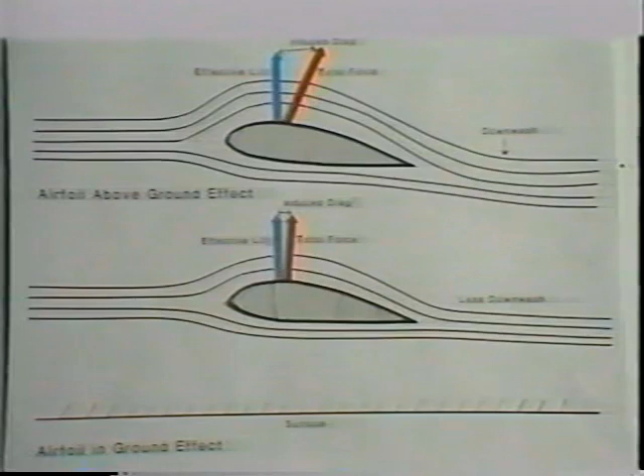We discussed previously how upwash, downwash, and vortices form around a wing in motion. You know from that discussion that a portion of the lifting force produced by the wing is directed aft and is referred to as induced drag. As the angle of attack and coefficient of lift increase, so does the induced drag. Induced drag is at its greatest when your plane is slow at a high angle of attack.

Suppose that we could eliminate some of the vertical velocities which develop ahead and behind the wing. This would lower the average relative wind and place the chord a little more parallel to the ground. If we could do this, the aft component of lift force, which we call induced drag, would not be as great, but instead would produce a slight increase in the effective lift. That is precisely what ground effect does. If there is no cushion of air, how does this happen?

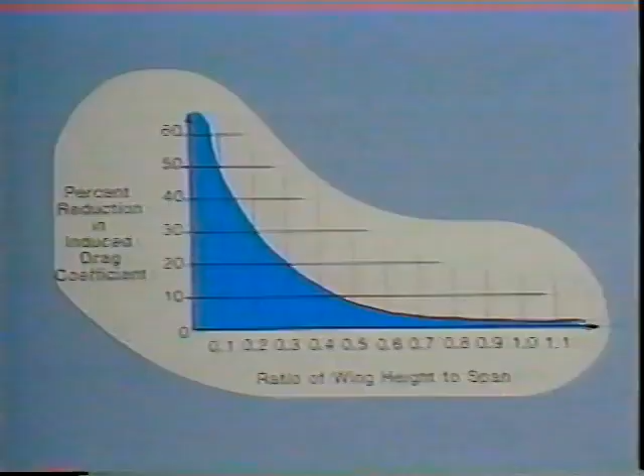The vertical movement of air around a wing disturbs the air at considerable distance from the wing surface. The vertical distance from this disturbance is roughly the span of the wings. Suppose that your plane has a span of 36 feet and that you're flying that plane 36 feet above the ground. The downwash should have some effect on the blades of grass below you. By descending even further, something has to happen to the downwash. It flattens out because it has no place else to go. The closer to the ground you fly, the more restricted are the vertical velocities behind the wing.

At wingspan height, you will lose about 2% of the induced drag. At half the wingspan, you have eliminated about 8% of the induced drag. And when you get down to a quarter of the span, you will have eliminated nearly a quarter of the drag.

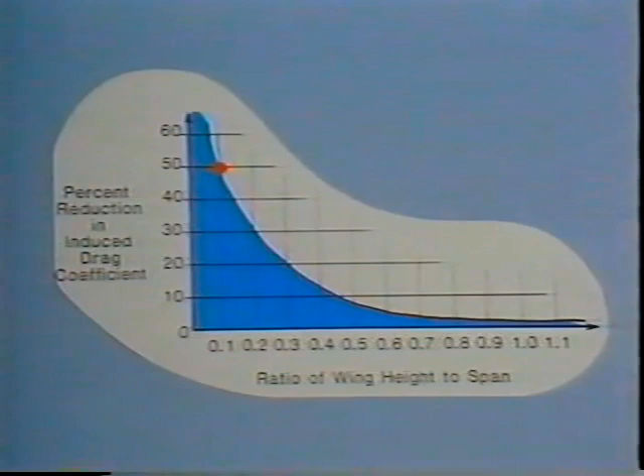At touchdown, you will have gotten rid of as much as half of the induced drag. Parasite drag, of course, is hardly a factor at speeds we are talking about. All aircraft encounter ground effect, but it is obvious that the effects will be a little greater on low wing types. However, the difference in location of wings doesn't have a large effect, and the suggestions for flying in and out are similar for all types.

We all can remember those student landings when you had everything set up and ready for the flare. Then suddenly the plane ballooned up, the nose pitched down, and you floated and floated. You probably had a little excess speed when you entered the ground effect. With less drag to slow us down, we used most of the runway. No touch and go on that one.

If you had a good instructor, he would have taken the time during the taxi back to explain why you had used so much runway.

I haven't mentioned the tendency for the nose to pitch down in our earlier explanation of ground effect. Planes are designed to be slightly nose heavy. The downwash affecting the horizontal stabilizer is used to counteract this nose down pitch. The purpose of this is for stability, which will be discussed more fully in another presentation in this series. We know then that it is necessary for the horizontal stabilizer to have the downwash in order for it to be effective. In ground effect, the downwash is diminished, allowing the nose to pitch down.

This means that upon entering ground effect, you will have to use more elevator. A full stall landing will take considerably more elevator than a normal power-off stall at any altitude.